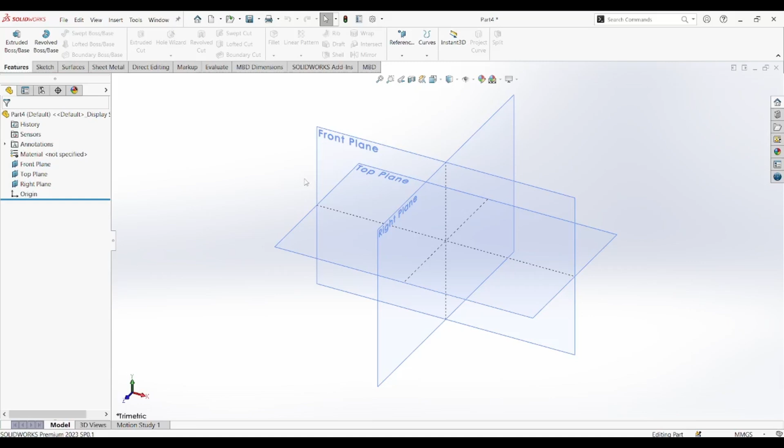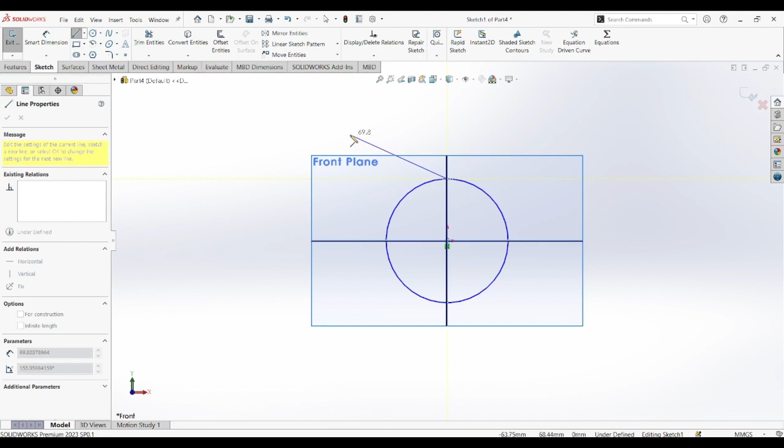Today, we are proud to present a comprehensive look at a key component in our latest engineering design project: a fixed blade for a shredder machine, meticulously modeled and assembled using SolidWorks. This fixed blade is an integral part of the shredding mechanism, designed to work in tandem with rotating blades to efficiently tear through various types of materials.

At Blueprint Bazaar, we focus on precision engineering, and this blade reflects our commitment to quality, functionality, and CAD excellence.

The modeling process began with a deep understanding of the shredder's operational requirements. We started by designing the core profile of the blade using SolidWorks sketch tools, making sure every edge, slot, and notch was precisely aligned for optimal interaction with the rotating cutter.

The geometry was then extruded and refined with additional features such as chamfers and fillets to reduce stress concentrations and facilitate easy assembly. Special attention was given to the mounting holes and positioning elements to ensure perfect alignment and firm attachment to the shredder frame.

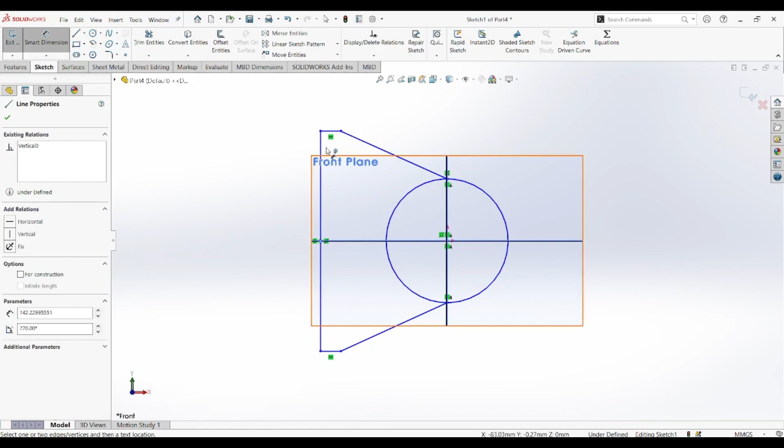One of the highlights of this blade is its robust design. It features a thick body that resists bending, along with sharp, durable edges capable of handling materials ranging from plastic and rubber to lightweight metals.

Using SolidWorks simulation tools, we evaluated the structural integrity of the blade under various load conditions. These tests allowed us to make informed decisions about material selection and design enhancements, leading to a more reliable and longer-lasting component.

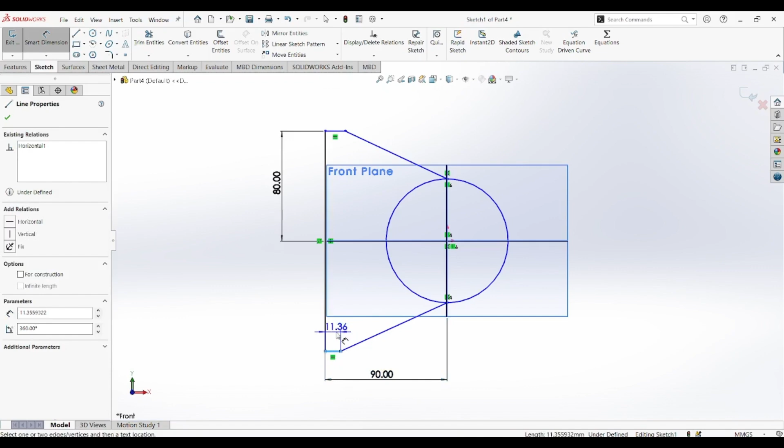This fixed blade is just one part of our larger shredder machine project, but it plays a vital role in the overall functionality of the system. It stands as a testament to the capabilities of modern CAD software like SolidWorks when combined with solid engineering principles.

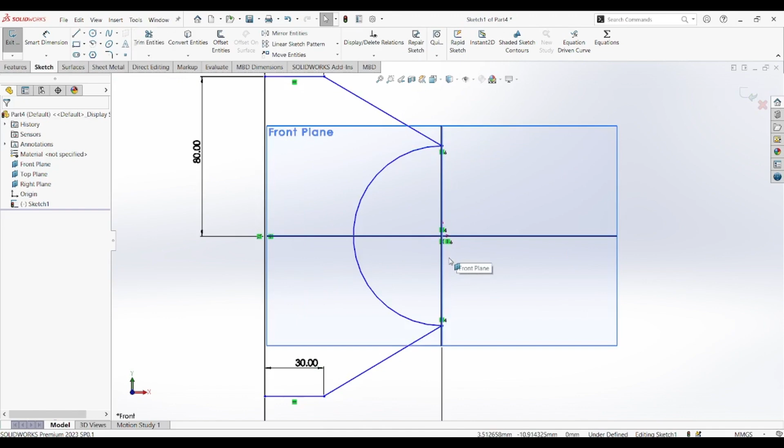At Blueprint Bazaar, we strive to bridge the gap between digital design and real-world applications by bringing high-quality, functional components like this to life through innovation and attention to detail.

Whether you're an engineer, designer, student, or simply someone who enjoys the world of machines and mechanics, we hope this model inspires your creativity and adds value to your understanding of industrial design.